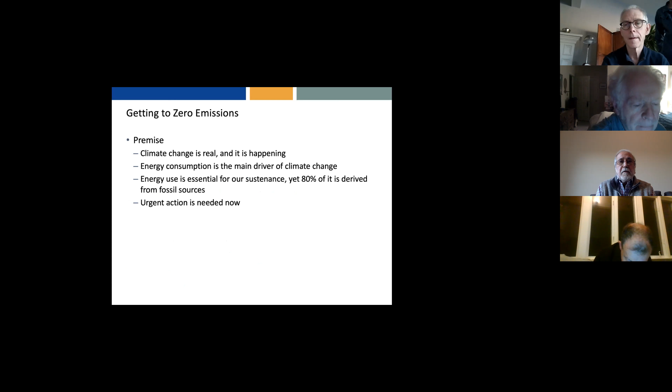I am not going to talk a whole lot about the climate crisis that we have. That's the premise of this talk - that climate change is real, it's not a hoax, and it is happening. What is also known is that energy consumption is the main driver of climate change. Why? Because energy use is essential for our sustenance, and yet 80% of it is derived from fossil sources. So when we use them, we end up emitting greenhouse gas, and urgent action is needed now.

Now, we have been talking about this for a long time. This is showing you data since after Rio, from 1993 onwards, the amount of different fuels that we have used to get our energy. This is from the BP Statistical Review of World Energy, they do us a great service compiling data every year. I've just changed the units to cubic miles of oil. So this green thing is oil.

Here is natural gas. Coal is up top here. So these are the three main fossil fuels. But the others are here in between: there is nuclear energy, hydroelectric, and other renewables.

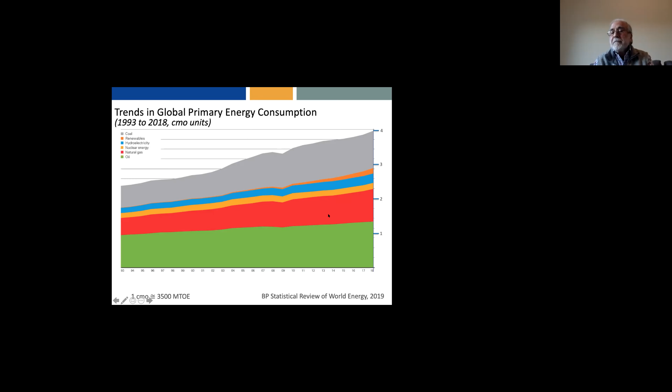We still are getting most of it from coal, oil, and natural gas, and we have to get away from that soon. With that premise, urgent action is needed now, because if we don't do it by 2035 or 2050, we really have to get to zero emissions. It's not going to happen, and it takes a long time, so we are cutting it short because we had not taken the urgent actions necessary a while back. So what's the path forward?

One of the paths that has been proposed, and I tend to agree with it, is we should try to electrify everything: transportation, industry, the built environment, meaning heating our homes, lighting, entertainment, and communications, which is largely done with electricity at the moment.

But what we also need to do is produce that electricity from carbon-free sources. This is what the Green New Dealers would also like us to do. The methods they propose, I would submit, are not going to cut it, and there is therefore the necessity of really expanding nuclear power.

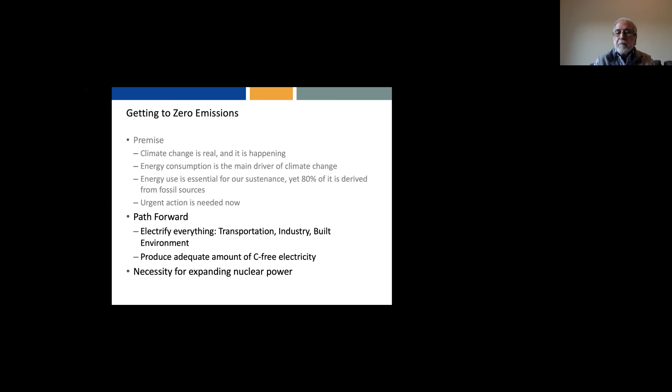Now, one of the reasons for emphasizing nuclear power and provoking this discussion today is that when you say nuclear power, many environmentalists immediately throw the thing off and say, well, no, we're not going to do that, we don't want to talk about it. It has really caused a lot of problems, mainly as a result of conflating nuclear power with nuclear weapons, and a lot of the problems come from that. I'll be addressing some of these issues in a few minutes.

Let's take a look at where the CO2 emissions are coming from. As I said, electricity and transportation are the two big sources. And electricity goes mainly into building operations, that is heating, lighting, and ventilation of buildings, and transportation: automobiles, planes, cars, trucks, all that.

Some industrial processes also require fair amounts of carbon sources, and the heating done in industry is generally done using methane or coal. Then there are some materials like steel and iron. When you refine iron ore, you use carbon as a necessary ingredient, because the carbon in coal is what reduces the iron ore, which is iron oxide, into the metal. So it is chemically required, but all these things end up producing CO2.

So even if we electrify everything and get our transportation sorted, which is what people are mostly talking about, there'll still be the industry and building materials sectors left. There's a lot of innovation needed to figure out how to decarbonize these things. How do we get steel without using carbon, but maybe using hydrogen, which we could produce from clean electricity? Or how could we provide heat needed for industrial processes, not by burning methane, but by using electricity, hydrogen flame, or really hot gases out of a nuclear reactor? That's a possibility too, I'll talk about those in a bit.

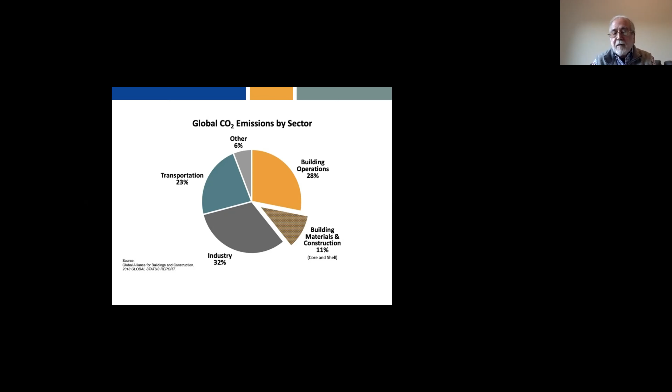Now, one other response that I have seen many times is, oh, we have just way too many people, we just need to cut the population. Well, whose population are you going to cut? It's part of the question.

There's a strong correlation between energy consumption and affluence or standard of living, the United Nations Human Development Index scale, which has as its components things like life expectancy, infant mortality, per capita GNI, education levels. They combine all these factors together. You can look at it individually too, and the graph basically takes this form: plotting how countries rank on the Human Development Index against the amount of electricity, primary energy consumption in this case, though I could use kilowatt hours or other units.

There is a dramatic rise in the beginning, after which the line kind of plateaus. That means consuming beyond a certain point, like 1,000 gallons on this graph, doesn't get you a whole lot more in terms of the development index, but it certainly gets you out of poverty.

Between 1980 and 2004, China lifted about 600 million people, that's twice the US population, out of abject poverty, and reduced infant mortality from about 2,000 a day to less than 700 a day. Now, 700 is still a fairly high number, but worldwide, the infant mortality rate today stands at about 17,000 a day.

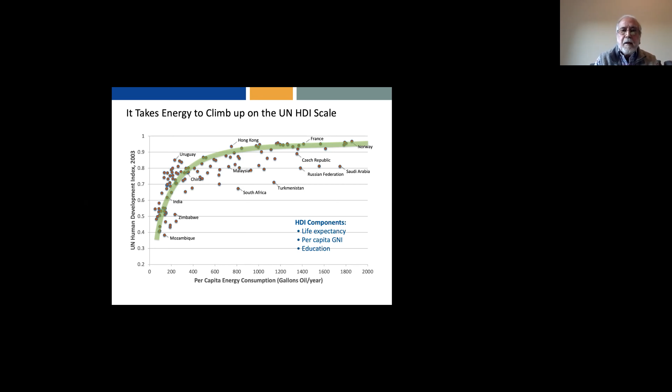And so lifting that up, that's what you need to look at first. I used 2050 as a target because by then we need to be entirely carbon free. So let's see how much energy we would need by then, using this graph I was showing in the previous slide, to afford everybody in the world a decent amount of energy to lead healthy, productive lives.

So make some assumptions. We estimate about 9 billion people by then; already we are about 7 plus. The desired minimum per capita energy consumption to ensure a Human Development Index of about 0.9 is, as I showed in the previous graph, about 1,000 gallons of oil equivalent per year. I'm not saying we'll be using gallons of oil, that's just a unit of energy, as much energy as a gallon of oil provides. It's still less than half the US consumption, and it's comparable to what's in Europe and Japan.

Translated, it all amounts to about 9 trillion gallons of oil worth, or in my cubic mile of oil units, it's north of 8 cubic miles of oil per year. In terms of electricity, if I use 1 gallon of oil gives us about 12 kilowatt hours of energy. If we just look at the primary energy content, the BTUs of a gallon of oil and the BTUs of electricity, a gallon of oil is often equated with about 36 to 38 kilowatt hours.

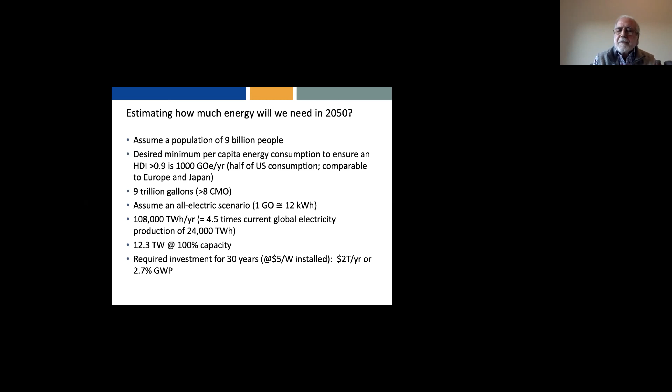But it has to be a commitment and consistent for 30 years. We could do it, it's doable. So that's it, but we don't have a whole lot of time left to deal with it. We have wasted a whole lot of time.

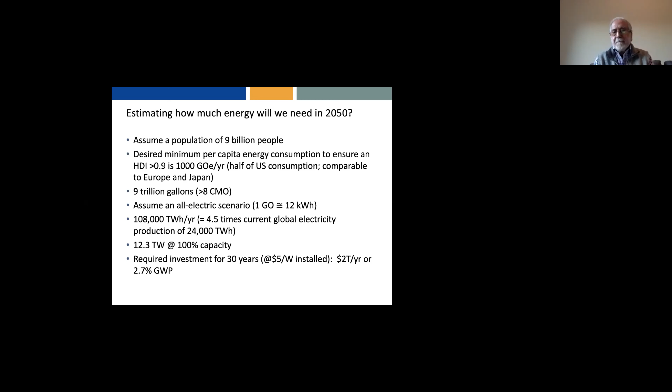A word about renewable energy sources, which are the favorite. I put quotes around it because I use this term somewhat advisedly. First of all, renewable energy is a misnomer, it's a marketing ploy. Why do I say that? Energy is never renewed, it always dissipates. Okay, so renewable energy is a great thing.

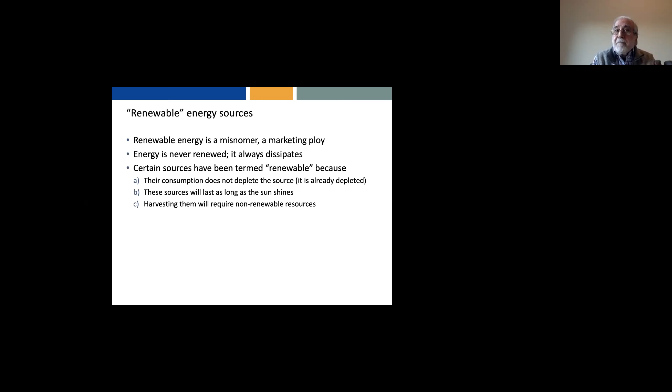It does produce renewable jobs because these plants need to be constantly renewed also. Certain sources have been termed renewable because their consumption does not deplete the source. Well, the source is already depleted by the time you get to the energy. These sources will last as long as the sun shines, so that's why they're called renewable.

But harvesting that solar energy will require non-renewable resources, and sometimes a lot of it. We'll look at what the requirements are to produce it at scale. It's one thing to produce enough for myself at home. But if I want everybody to be doing it, how much silicon do I need? How much steel do I need? We'll look at some of those things in a minute. That's where the problem comes.

It's not that the sources—the sun will last another 4 or 5 billion years, and we probably won't survive anywhere near that time, nonetheless.

And if longevity is the criterion, then nuclear power should also be termed renewable, and then be accorded the same kind of credits—the renewable energy credits, which are a major revenue source for wind and solar farms. That's what makes them economical. That's what people say, oh, the prices are dropping. Well, that's because they're not really costing them correctly.

They are not adding any costs for what it takes to integrate these intermittent sources into our current energy system, nor do they account for all the different revenue streams.

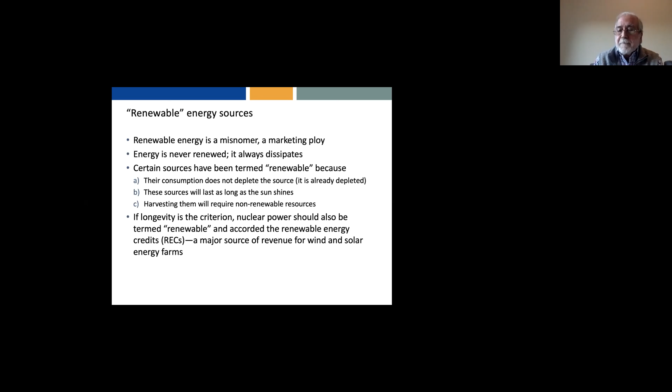There are certain challenges for this all-renewable scenario. First of all, wind and solar are intermittent sources.

I'm not talking about hydro, mainly because hydroelectricity, I think we have come close to saturating it. The world produces about 0.2 cubic mile of oil worth of electricity from hydro, and I don't think there are enough rivers left in the world that could be dammed. You could at most double what we have today, but that would just take you from 0.2 to 0.4. So if you really want to do something, you have to look beyond hydro power of this kind. There are applications for hydro, different kinds of hydro, run-of-the-river hydros, but the amount of energy you can extract from them is limited.

Capacity factor for wind and solar is often less than 30%.

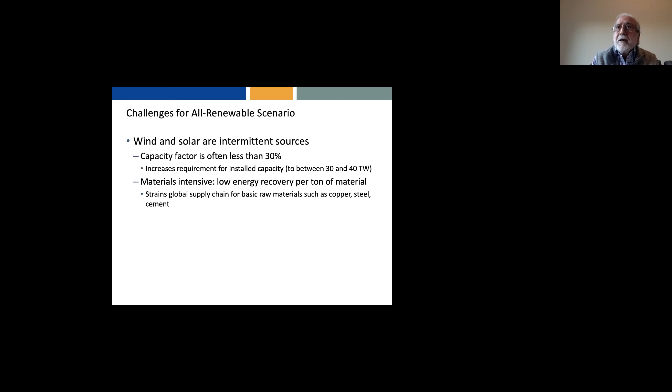Then, because the energy source is dilute, the materials required to harvest it are substantial. It takes several hundred tons of steel and concrete for every megawatt of solar or wind installation. If you do the math, it will strain the global supply chains for things like copper, steel, cement, glass, aluminum, you name it. And I'm not even talking about rare earths or other exotic materials whose supplies are also extremely limited.

And then a big question that so far the renewable people have not addressed head on is the amount of storage required. Intermittency means that you must have storage on terawatt-hour scale. Currently, that is provided by having the grid in the background to back us up, and the grid is running mostly with gas-fired turbines.

Gas-fired turbines are used because they can be ramped up and shut down very quickly, so they can be used to track demand. But these are not the most efficient use of gas - gas-fired turbines are a lot less efficient than combined cycle natural gas plants, CCNG. If you really wanted to use natural gas to produce electricity, you'd use dedicated combined cycle natural gas plants 100% of the time, and your greenhouse gas emissions would be less than if you used photovoltaics backed up with gas-fired turbines. That's how it works out. But we don't count those emissions towards photovoltaics.

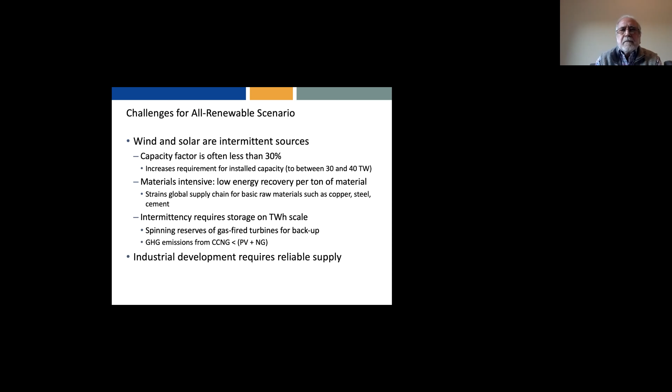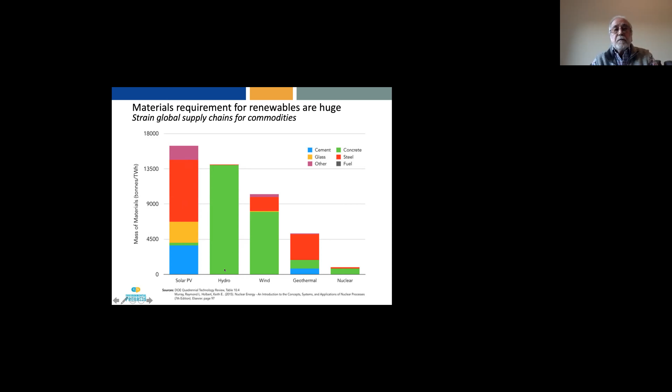Here's a slide that shows the materials requirement for some of the renewables compared to nuclear. For solar photovoltaic, there's cement, glass, steel, and some others. So for photovoltaics, you can see how much - for the same amount of terawatt-hours, thousands of tons are needed. Compare that to nuclear, which is minuscule. Wind is about 10 times as large as nuclear, and solar is about 14 times as large.

Let's consider a scenario: say I'm using the minimum 30 terawatt scenario, with 20 terawatts of wind and 10 terawatts of solar. This is much like what Professor Jacobson at Stanford has been proposing in his 100% renewable scenarios. There are lots of papers on that - many people have talked about it.

And I'd ask, well, how much steel is required for this scenario? You need 25,000 million metric tons of steel - that's 25 billion metric tons. I'm using million metric tons, MMT, because that's the unit used for a lot of things. So if I want to ramp this up in 10 years to get to 20 terawatts of wind, I'll need 2,500 MMT per year. At the moment, world steel production is only 1,900 MMT. So that doesn't even match the 2,500 needed - I'd have to more than double steel production to feed this new demand of very fast wind installations.

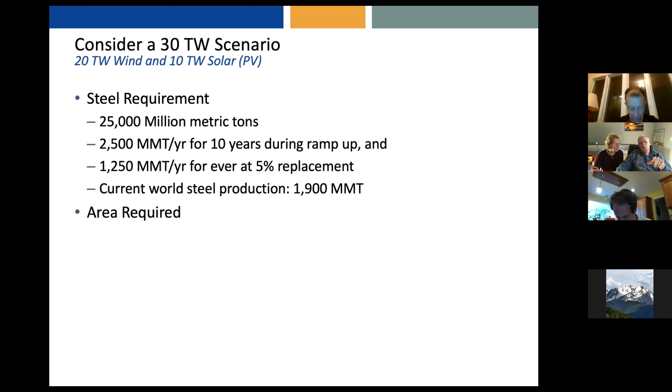Producing steel requires digging a lot of iron from a variety of places. And if we use it the way we're doing it now, we'll also use billions of tons of coal for that, which we don't want to use. So we also need to start thinking about how we're going to produce steel and concrete without using carbon.

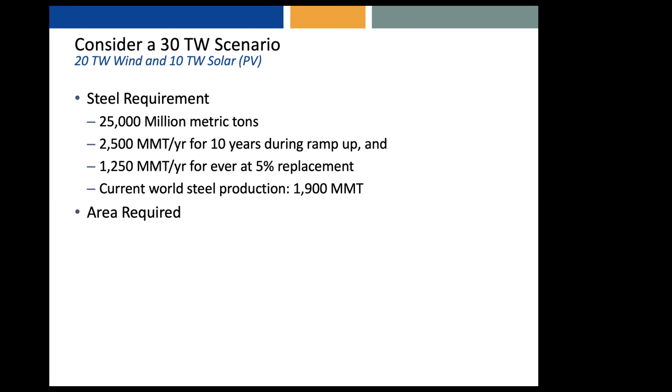Let's look at the area requirement for this wind farm. We have about 5 million square kilometers as the area that will be required. What does 5 million square kilometers look like? Well, it's about half the US area. Now, of course, I'm not saying cover half the US area, this is for worldwide, but if I want to visualize, that's the amount of land. Look on a globe, the US is pretty big, and half of that land is to be covered with windmills in the world.

Generally these have to be located at places where wind is constant and high, and those are generally the ridges. And as we deplete those ridges and put in roads along the side for servicing, there's a lot of land use change, and we will be encroaching on lots of other species' habitats. And encroaching on wildlife habitats increases the risk of pandemic. That's one thing we have learned with COVID.

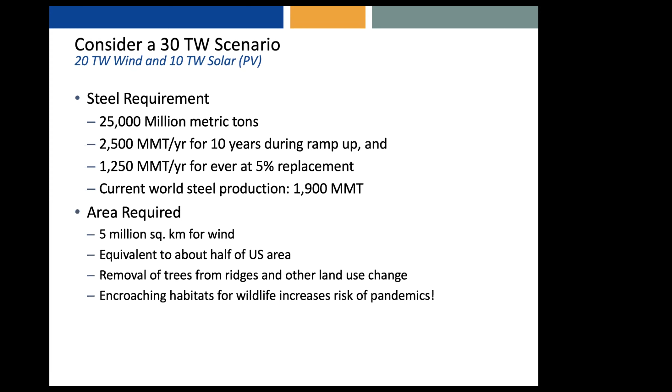So that's a serious consideration. Let's look at battery storage. I did not talk about the concrete, and if it just adds up, it's just as bad or worse. I want to get to another part, which is the storage.

Everyone's seen lots of articles about electric cars and batteries in the press lately, and yes, the prices of batteries are falling. That's great news, they are getting better and more affordable, and that's all good. But if I need to provide storage for this 30 terawatt system, I need at least 4 days worth of storage in the back. That's like 100 hours. So I need storage on the order of 3,000 terawatt hours.

Chemically, I can look at how much lithium I need per megawatt hour. It's about 260 tons, we know that. So that's just from the chemistry and the potentials that lithium batteries can give us. This is just from basic principles. You could probably improve a little, but we generally get worse as we go on. So this is better than what these Tesla batteries are at the moment.

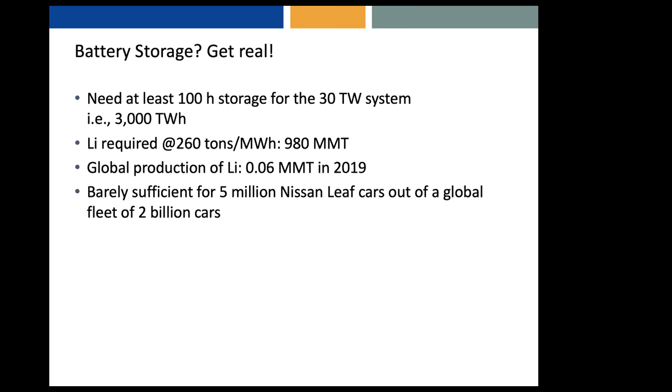So that is what brings me to nuclear, because the energy density of various fuels, if I plot them on a scale—this is a cartoon I pulled, I didn't note the source, I had it on my other slide—the fuel energy density of sugar, coal, fat, these are in megajoules per kilogram, gasoline. But you come to uranium, and you'd need reams and reams of paper to print it on a linear scale, because nuclear has about 16,000 times the energy density of coal.

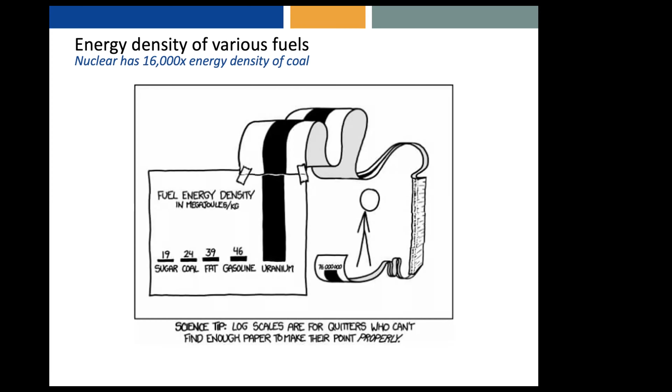So all the benefits of nuclear power really come down to the fact that it is extremely energy dense, which means you can do with 1,000 tons what would otherwise require billions of tons. This high energy density also means a much smaller environmental footprint, not just in terms of where the nuclear power plant is situated, but also all the digging you have to do and the natural environment you have to encroach upon to get the resources.

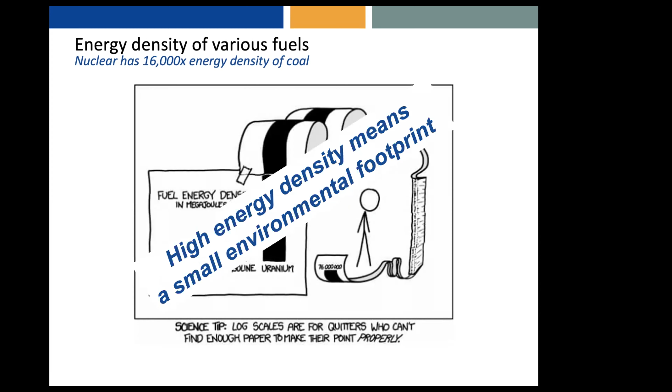A simple schematic of the most common pressurized water-cooled reactor. The energy in nuclear power comes from the fission of uranium-235, the fissile nucleus. When we hit it with a neutron from a source, it breaks up into two comparable pieces—barium, krypton, strontium. Some of these common lighter elements formed are also very radioactive, and they emit more neutrons, which can then cause the fission of another uranium-235. It's balanced, but this heat is then extracted with water.

You can keep it in a pressurized controlled system, or there's the boiling water scheme—there's a slight variation on it. But I want to draw attention to the fact that there are several loops here. The primary loop of the heat exchange going on, that water just stays over here; it does not communicate with the water that's coming out to drive the turbine.

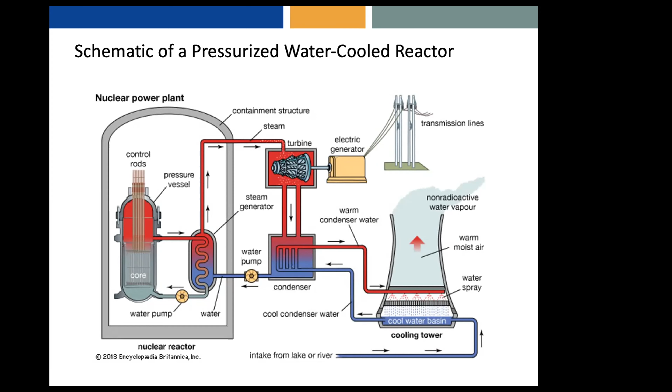Nuclear power has the lowest CO2 emissions over a life cycle. If I look at the levelized CO2 emissions per kilowatt hour, coal of different varieties is almost 900 grams of CO2 per kilowatt hour. Natural gas combined cycle is around 400, but the gas turbines are up here at about 700.

Photovoltaic is, so that's what I was telling you, the natural gas combined cycle, which is much better, but what we use for backup power is this variety. So it has a lot more, but you run this twice as long or sometimes, so it depends on what the demand is.

The bunch of others, here's the photovoltaic for the residential or photovoltaic at a utility scale in the 40s or high 40s. Concentrated solar power is also around in the 40s. Wind is much lower, only 14. And that's because...

It's not that during the production of electricity, wind and solar are emitting CO2. This is the CO2 that was emitted in the production of the facility, in the maintenance and the operation over the life cycle of it. That's the amount of CO2 that was emitted. And nuclear compares favorably with all these.

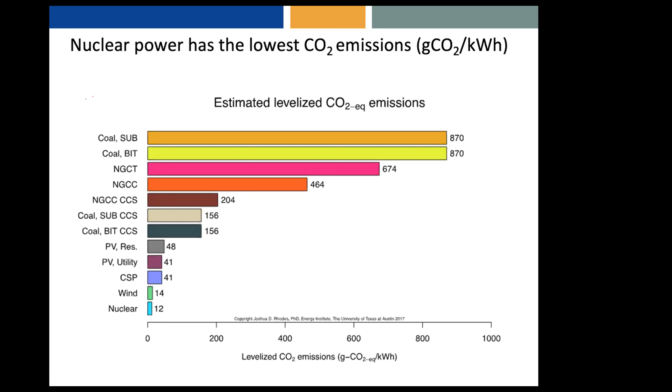We're really afraid of radiation. That's one of the biggest things. And we, meaning the scientific community, also have to take some responsibility for scaring everybody about the dangers of radiation. A lot of it started with the atmospheric tests for the nuclear weapons, and there was radiation falling out with fallout and all that.

And prior to that, the world had seen horrendous tragedies from the atomic bombs, and that image is seared in our brains. The theory that developed was, well, radiation causes DNA damage and it's lasting forever. We don't know at what point it changes, we don't know which of these are going to be cumulative. So all radiation is bad.

And you have to go as low as you can achieve it. And so, forgetting for a moment that we have evolved with a lot of radiation, we are always living on Earth. We get exposed to 3 to 7 millisieverts per year of radiation.

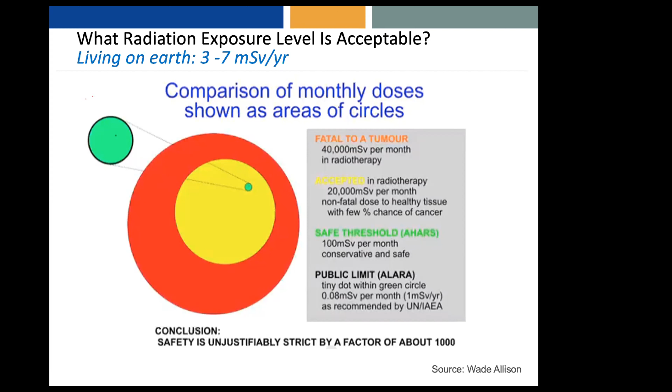Despite all this, nuclear energy remains the safest energy source of all. It saves lives compared to all others. If you're going to be using coal, you can, on average, think about causing about 160 premature fatalities from emissions—not the CO2, but the pollutants, the soot and NOx, the nitrogen oxides and other things that cause respiratory damage.

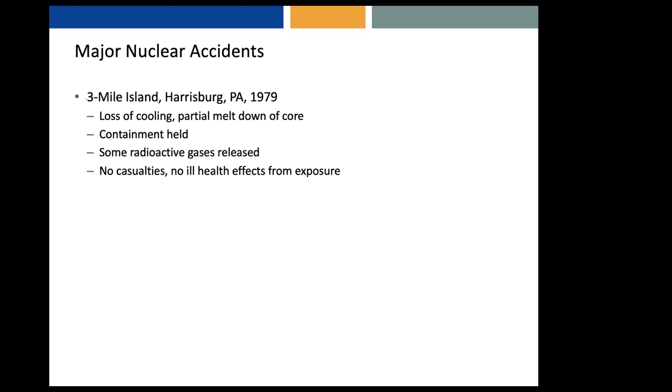Three Mile Island happened, but one important thing to remember is that this happened, unfortunately, within weeks of the movie The China Syndrome. And that coincidence really was a disaster for nuclear power. It caused a lot of public opinion to change. But I think it's our response to the fear of radiation that is worse than the radiation itself. There'll be more examples of that coming up, also in Fukushima.

Chernobyl was really a disaster. There was a steam explosion that happened during a flawed safety test that they were running, and they shouldn't have been running it. If you're interested in more about it, you'll have to read my book, or we can talk about it another time.

But one of the things is that we don't build reactors like that. It was in the Soviet Union, and they had built reactors with no containment, so the roof was blown off. The fire, as oxygen contacted the hot graphite in the core, released more radioactivity and exposed 600,000 people. 50 workers died from acute radiation exposure, and about 231 suffered radiation illness.

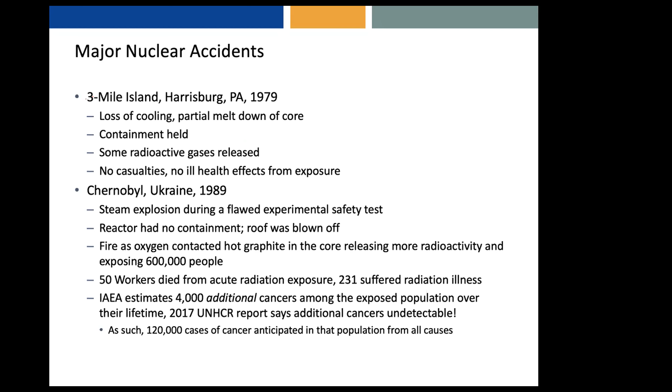The International Atomic Energy Agency, at that time in the late 80s and 90s, calculated there might be about 4,000 additional cancers among the exposed population. As such, in the exposed population, because cancer is not a very uncommon disease, 120,000 cases of cancer are to be anticipated. But any additional cancer is definitely an additional - we don't want that.

Let's talk about Fukushima. There was the earthquake, and the plant shut down according to plan because it sensed the earthquake. It lost power, and the connection from the neighboring grid, it lost power from that also. So they had to turn to their backup plan, which is the diesel generators on site.

For some reason, these diesel generators were located well below where the tsunami was going to hit, at the lower levels, which was something that had been pointed out many times to them, but they hadn't moved them out. They got flooded, and so couldn't keep the reactor cool, and there was fuel meltdown. But the containment vessel held. However, because there was hydrogen resulting from it, they had to release the hydrogen outside the containment area periodically.

But hydrogen and air do form explosive mixtures, and that's why in the secondary confinement there were those explosions we saw on TV. That led to some release of radioactivity. Over 100,000 people were displaced because of that. Now, of course, the tsunami killed about 17,000 people in the first shot.

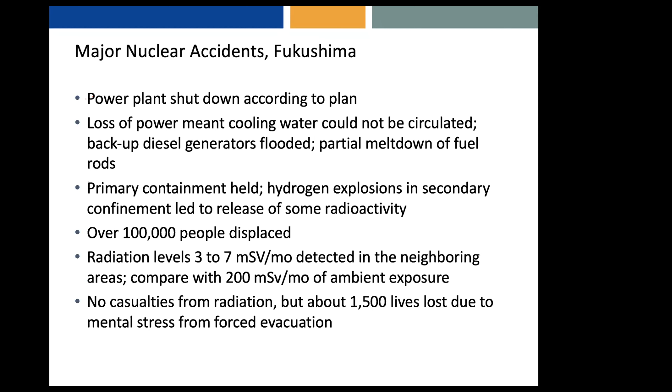Some of the common objections to nuclear power are, oh, what are you going to do with the waste? Well, first of all, it's a matter of terminology - I don't call it waste. Over 90% of the original fuel value is still in there, it's a resource. Second, the waste we talk about is a solid pellet inside a steel rod, inside an assembly. They're kept in a concrete cask, and these are passively cooled - just air flowing through keeps them cool, and people can walk right up to it.

These are kept at the site. So initially, when you pull them out of the reactor after some time, the rods are very, very hot, and you keep them in a swimming pool kind of arrangement.

It's a large pool of water. About 20 feet of water is needed to prevent the radiation from hurting the people around, who are the workers around, and also to provide adequate cooling.

But after some time, the radioactivity decays, and these rods are then pulled out. These assemblies are then moved into dry concrete casks. It's a solid, it's not going anywhere. It's not the green goop that's flowing down as we've seen in Simpsons episodes. And it hasn't hurt anyone.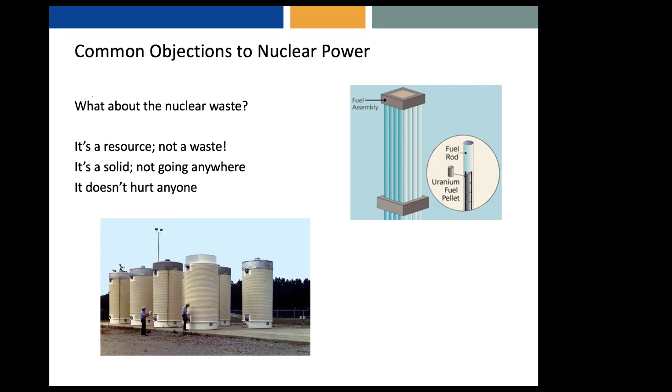Actually, this is a resource, because the next generation of reactors could use it as fuel to produce more power.

There are many designs for using them. I'm going to talk about one of these briefly. These are the molten salt reactors. They were developed at Oak Ridge National Lab in the 1960s.

So this was a test reactor. They were just testing out the scheme of the molten salt, to see if the salt—there's a mixture of lithium fluoride and beryllium fluoride, with uranium fluoride dissolved in it.

So as the uranium—maybe it's better to show it with the next slide. We'll have the diagram and I'll talk about it.

These are breeder reactors, which means there's a blanket of a fuel that is not fissile, but is what we call fertile. So thorium-232 is not fissile, but it's fertile, whereas uranium-233 is fissile.

So if you get to uranium-233, you can then break it into two with a neutron. But thorium-232, being fertile, can take the neutron, become 233, and then become fissile. Similarly with plutonium, 238 is fertile, it'll take a neutron, but then 239 is fissile—it'll also break and produce a lot of energy.

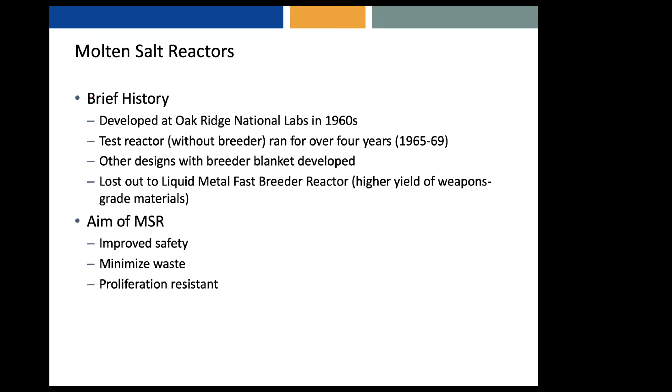Let me just show you what happens in one of these. This is with thorium. Thorium is another metal that is available, occurs very widely in the world. And it's a fertile nucleus—it is not fissile to begin with. It has a very, very long half-life, 14 billion years. Pretty much half the world's originally produced thorium is still around.

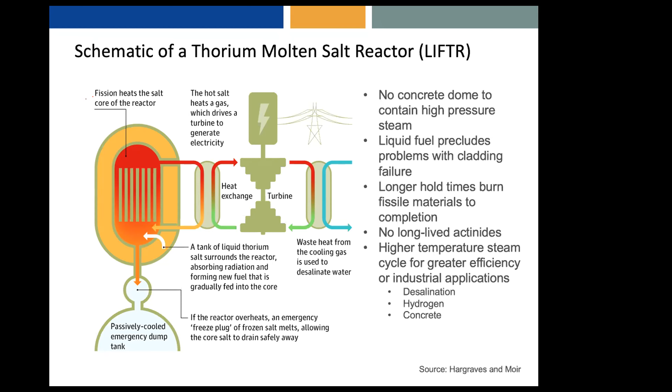It's an urgent task ahead of us at the moment, but I think overcoming public opposition to nuclear power is absolutely essential. I would hope that they can create an Office of Energy Education and public outreach. That would be something I would like to see happen.

I think among the specific actions I'd like to see is that we first of all stop closing functional nuclear power plants. If you find yourself in a hole, the first thing you do is stop digging, and we seem to be continuing to dig ourselves deeper and deeper into holes. We have to start giving nuclear power plants the credits that are given to renewable plants. Start building these walk-away safe nuclear power plants.

One of the ways we can make things economically viable is to fix the current electricity pricing. They do this based on auctions that look only at the marginal cost of production - what will be the cost of the next kilowatt hour, not what will be the system cost. These really skew the market and decrease reliability.

We need to start innovating a lot of new processes as we try to electrify industrial processes. Can we have green processes for steel, cement, fuels? How about some hydrogen? And because so much carbon is already in the air, after 2050 we really need to start bringing it down. That means carbon capture has to be integrated into our thinking as well.

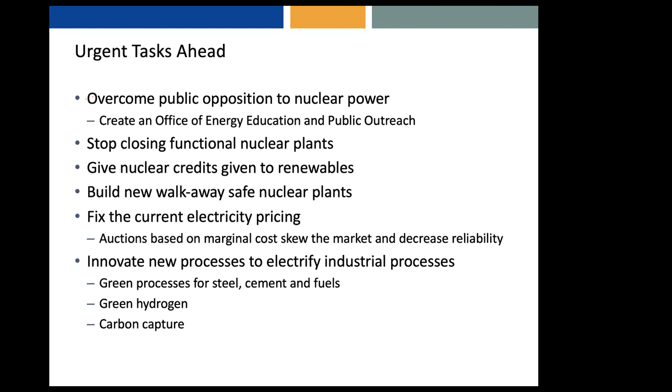Number 1, don't waste it - it's a very precious commodity. Be informed, read about it, read the book, get involved. Talk to your friends, talk to your neighbors, talk to your representatives. The book is kind of old, but I do maintain updates to it on my blog, which is cmo-ripu.blogspot.com, and I welcome you to browse through it and read about it.